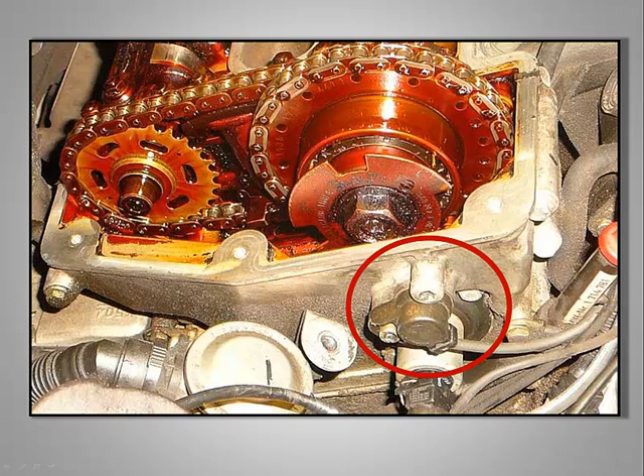Here is an example of a camshaft position sensor, or CMP, digitally triggered by the shutter wheel connected to the camshaft snout. This is a very simple example to make things clear for newbies, but it'll get more complicated as we go along. This is typically what the single VANOS system looks and operates on its on-off cycle.

The MS42.1 DME era, approximately 1995, was the first version of the electronics influencing VANOS operation. Take notice of the angled teeth of the helical gear, which cause the pushing movement of the helical cup to be converted into rotational movement.

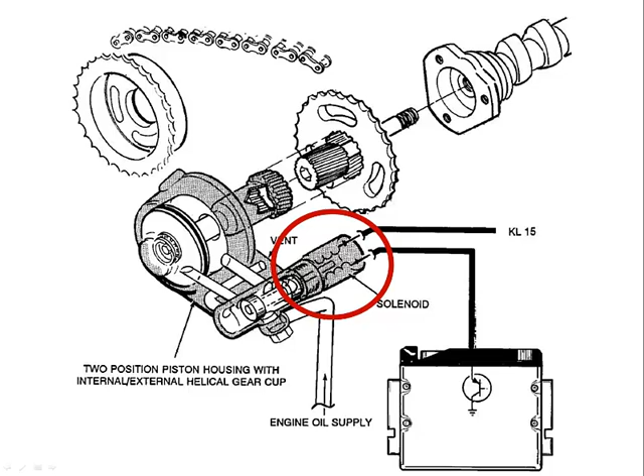In the retard normal position, which is the off position, the spool valve in the piston housing is held fully forward by spring pressure, directed by engine oil to the backside of that piston. This is caused by no ground signal to the VANOS solenoid, allowing oil pressure to exert from the oil port to the backside of the spool in the piston chamber. In simple terms, this part is pressurized by oil to set that spool valve to the farthest position forward in the VANOS, causing the camshaft to go into the retard position.

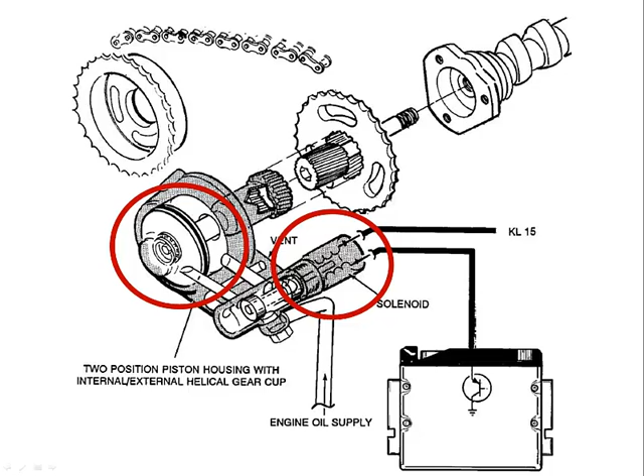Now, in the advanced position and function, the DME provides a ground circuit, activating that solenoid. The other side of the VANOS solenoid is powered by B+. The spool valve then pushes against the spring pressure, diverting pressurized engine oil to the front side of the piston, moving that spool to the back of the piston housing. This pushes the helical cup further into the matched helical camshaft secondary drive gear.

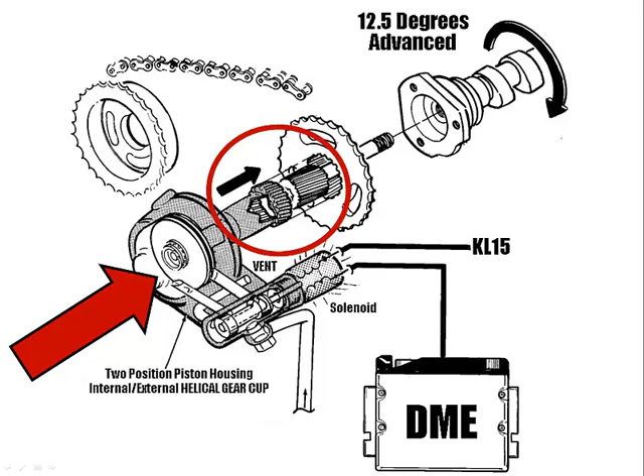Let's take a bird's eye view of this simple VANOS unit. Here is a simple single VANOS teardown. Your VANOS piston housing is here, and your spool assembly is there. Remember: spooling valve, spooling piston, VANOS piston - a rose by any other name, to quote Shakespeare. Simple, ain't it? Roger that.

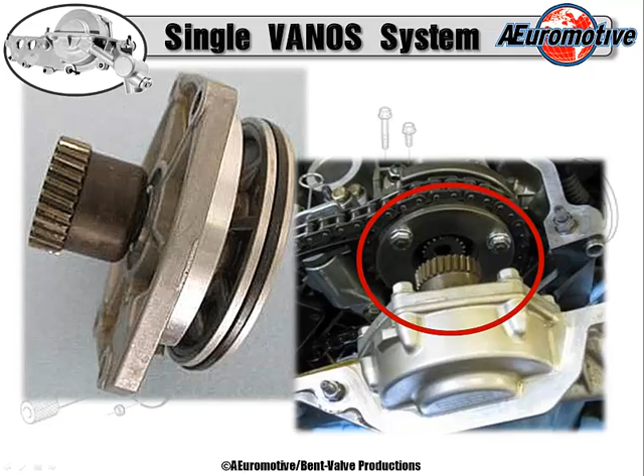This rotational movement is added to the turning of the camshaft and causes the intake camshaft to advance approximately 12.5 plus degrees, a very small amount. And as I stated previously, the early single VANOS system was a simple on-off system operation, and only for the intake camshaft.

Also note that the operation of the VANOS solenoid is monitored in accordance with OBD2 requirements for emission control. Before going further, there is a SIB, or Service Information Bulletin, related to that - the German version of a TSB for BMW, relating to rattling or rustling noise, related to the early model M50 engines with single VANOS.

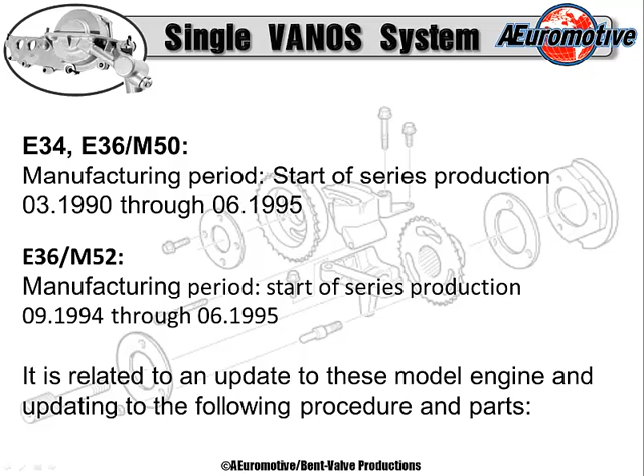These are the vehicle models covered in this SIB. By the way, get used to calling them a SIB, not a TSB. This is related to an update to these model engines and updating to the following procedure and parts. The fix: convert the VANOS adjustment unit to plate springs.

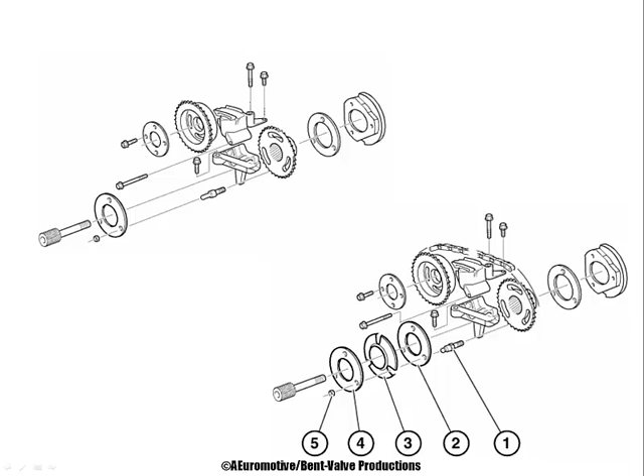This solution was introduced to series production as of June 1995. The newer version update included a 2mm thrust washer, a spring plate, and a 4mm thrust washer. Look at some of the slight differences in the conversion. Unless you knew what you were looking for, except for the thickness of those thrust washers, you probably wouldn't be able to tell. This is the original configuration, and there is your converted version - just a few additional pieces for this conversion, and there is your SIB number.

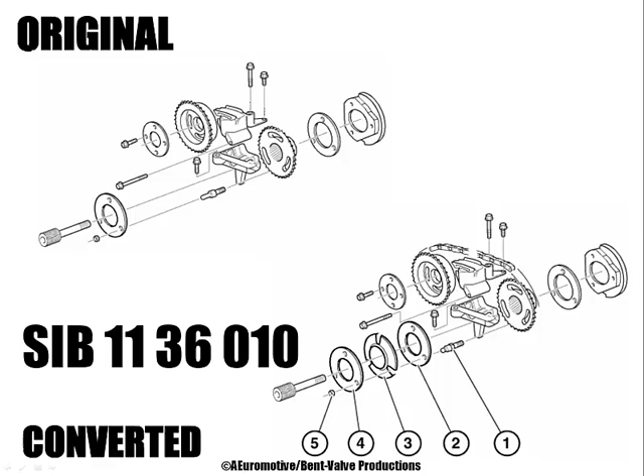This was a basic attempt to make a conscious effort to remedy the issue by tightening up the camshaft adjustments.

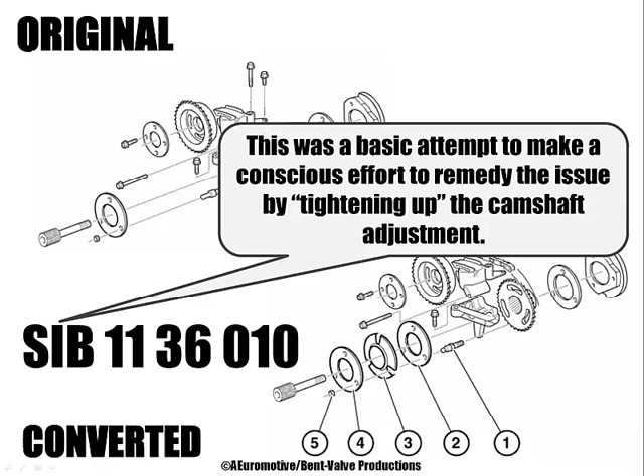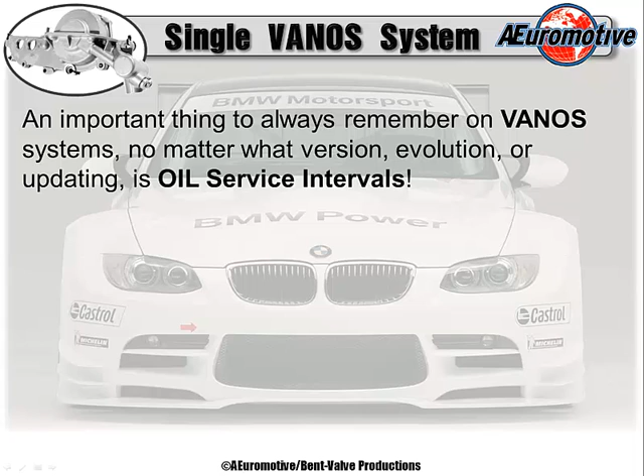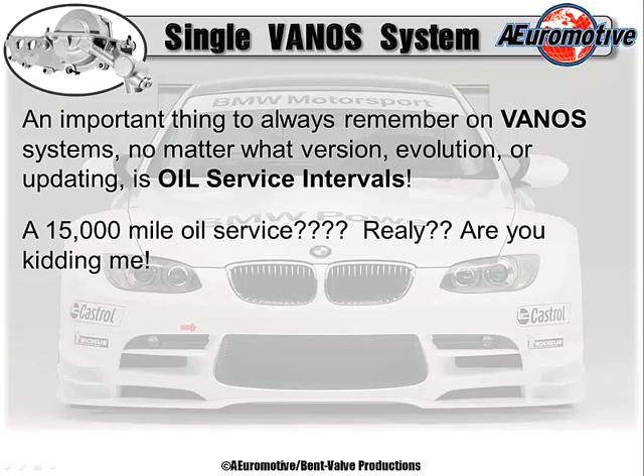An important thing to always remember about VANOS systems, no matter what version, evolution, or updating, is the oil service intervals. Why? Well, VANOS operates by oil pressure. So a 15,000 mile oil service? Really? Are you kidding me? What knucklehead out there would advise a customer to perform an oil service at 15,000 mile intervals?

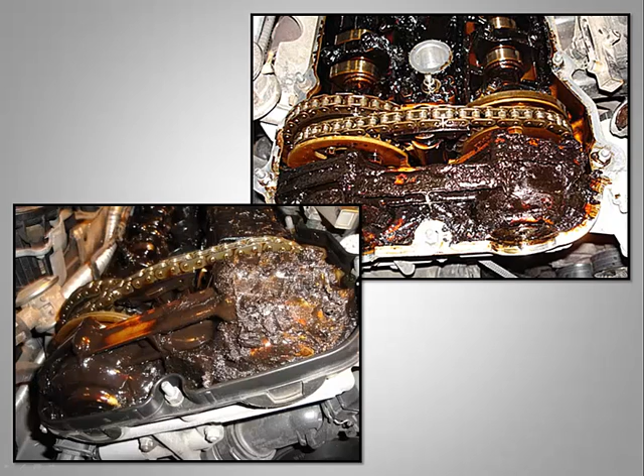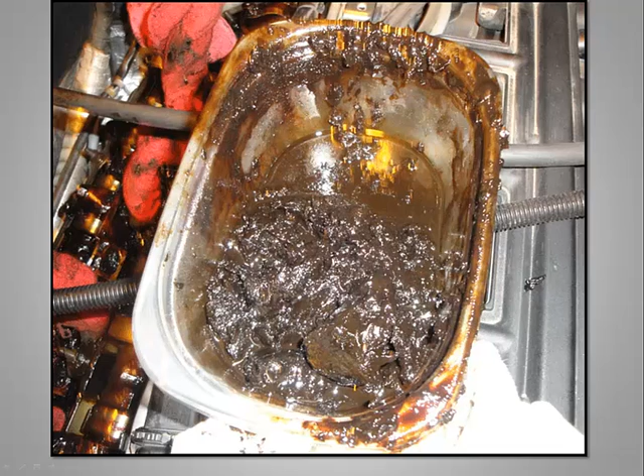Stop that. Otherwise, you're going to end up with something like that, or possibly even that. Bad juju there, my friends. Or how about that? Which one's worse? I think they're all really bad. And of course, that is the end result. Damage is already done. Heaven forbid. Ever seen a nightmare like this?

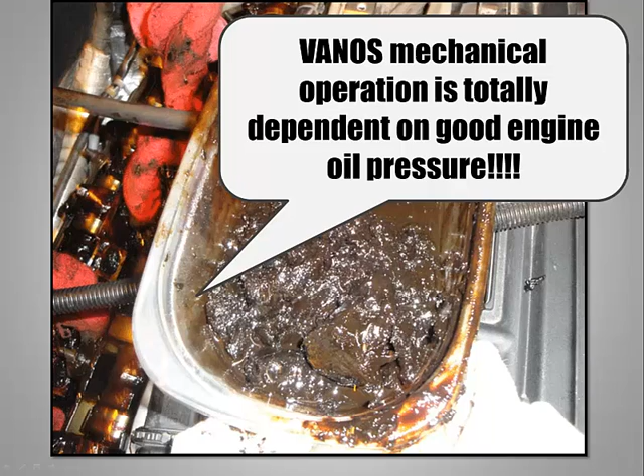Well, I have. This is what 15,000 mile oil service intervals will get your customer, and it doesn't have diddly to do with you trying to save them money. By the way, if a customer comes in and states that his or her 710 is missing on the engine, this just might give you a hint of what they're talking about.

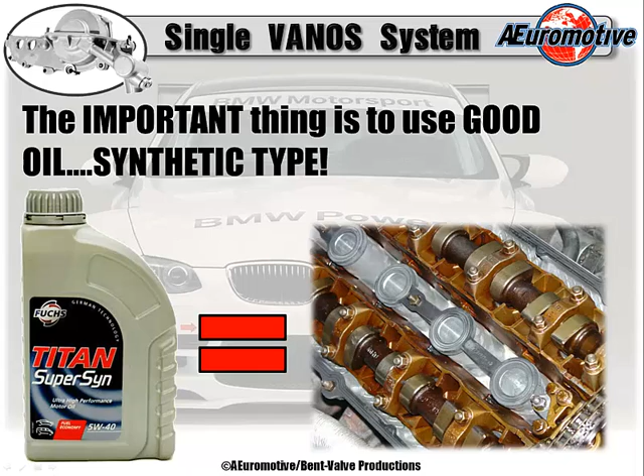The important thing is to use good oil, synthetic type oil. Fuchs makes an excellent oil. If the engine shows the goo condition, first thing you're going to do is flush the oil system aggressively. Make the customer aware and understand that 15,000 mile oil changes will kill their engine. And to bring the point home, tell them the cost for an engine replacement. Nothing like looking the hero to your customer.

If you have to flush the oil system aggressively, it's going to require probably several aggressive oil system flushings. Then so be it - the customer pays for their lack of maintenance. Charge accordingly to the possible fix, and I said possible. While you're at it, take pictures of the engine and the existing condition of possible damages that are already done. Keep a record to cover your six.